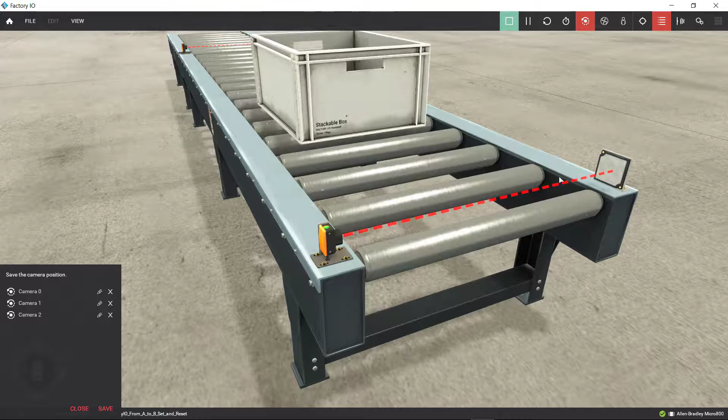Okay guys, this is another scene from Factory IO. On this one specifically, this is two conveyors. As you can see, I'm stopping on the first conveyor, then moving on to my second conveyor, and there, as soon as this sensor is made, I'll wait just a few seconds, and then the scene is automatically reset and started all over again.

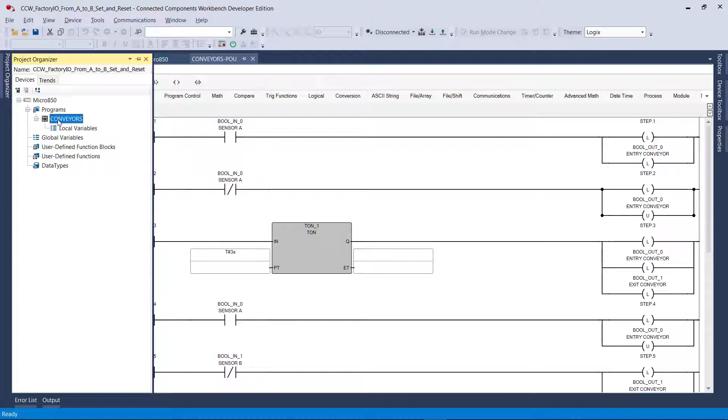Now the code, it's a little bit efficient because you turn off this conveyor if we're not using it, in order to save energy. And the whole sequence on Connected Components Workbench was completed in just one single run. So I'm going to show you the code. This is my program over here, and the variables that I created.

As you know, the variables for Factory IO all have to be global variables. So this is my global variables over here. Just the two sensors, the two conveyors, and my bits that reset my scene, and the one that tells me that it is running. Okay.

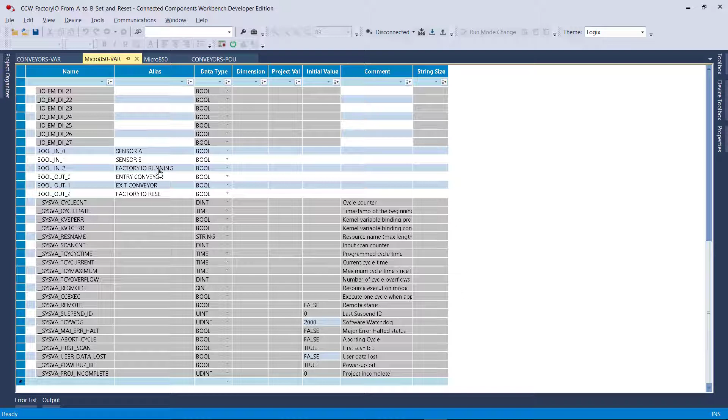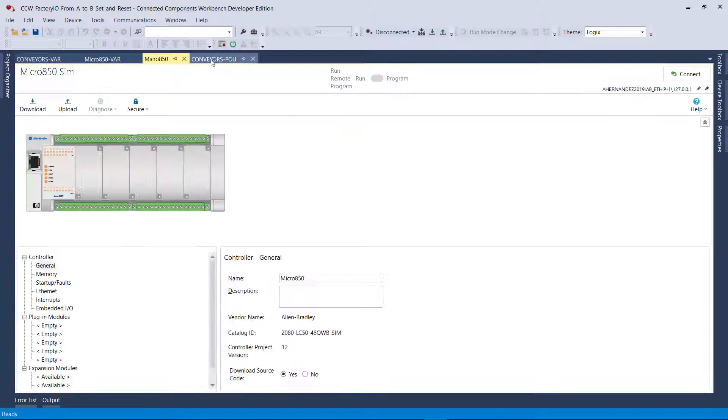So right here on my code, as you can see over here, I'm using stepping logic, like always. I created on my local variables my stepping logic right over here, a double integer, which gave me up to 32 steps. And then on my code, I got my bits that, hold on one second, let me put this on stop mode.

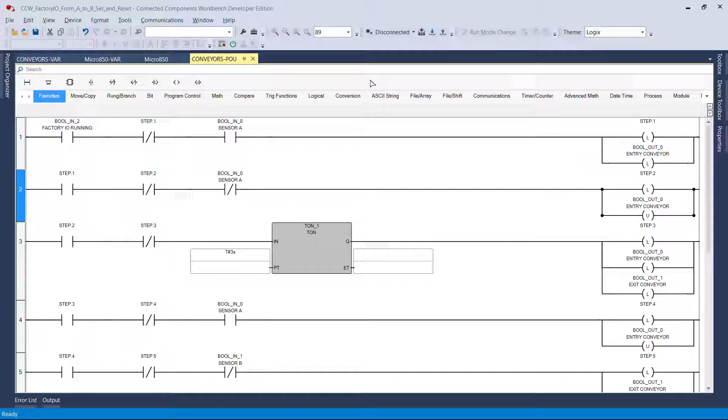See? This bit is the one telling me to go ahead and start running. If I put it on stop, it will not run, but if I go ahead and click on it, the entire sequence will start running again. So if my step one is not made, and my Boolean sensor, which is this one over here, is on, which it should be because it's normally closed, then I'm allowed to start my sequencer.

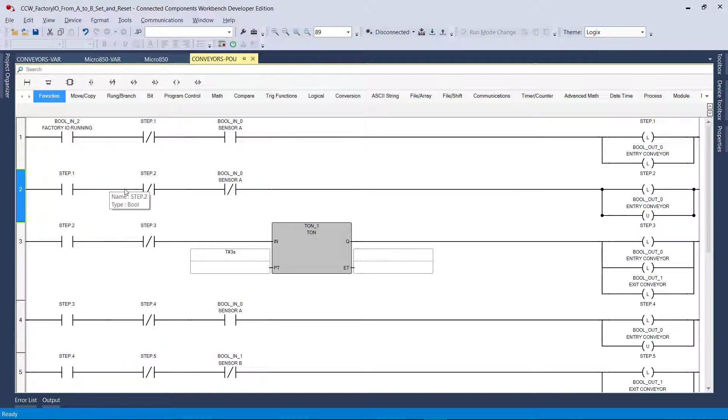So my sequencer starts with an entry, latching, and then moves on to the next one. When the load blocks this sensor, which is over here, I will stop that first conveyor. I will unlatch that bit, wait just a few seconds, and then move on to the next one and turn on the next conveyor on this rung over here.

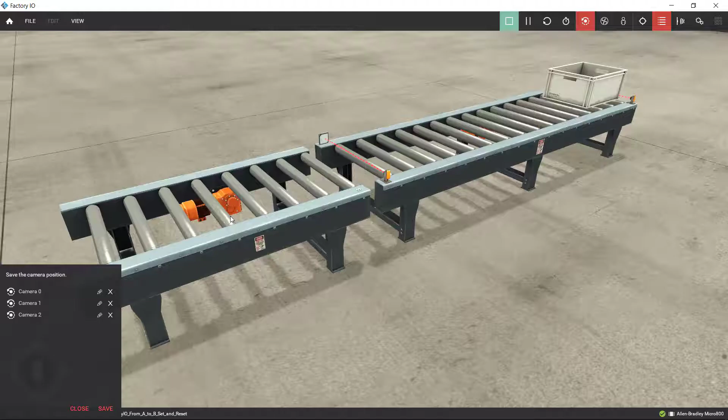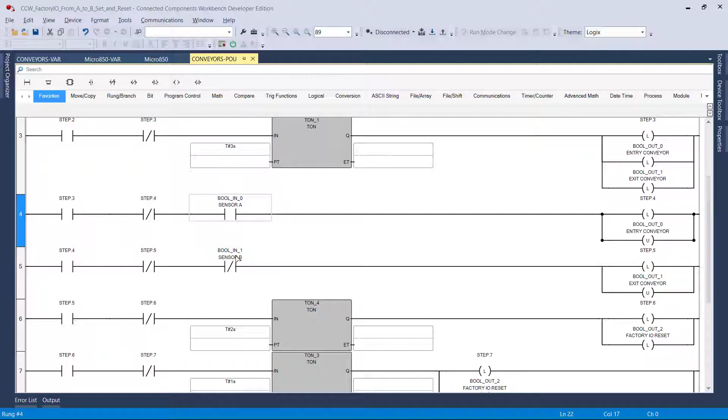Until further down the road, I can see that the sensor has been cleared, which is this behavior over here. The load is blocking, just 1 second, 2 seconds, and then boom, I wait until this over here turns off. You see that sensor over there? It turned off? Good. And then the same thing over here. This sensor detects the load, and then this rung takes over, which is step 5, and that way I can just unlatch my exit conveyor.

Then something funny happens over here that made me create an additional rung, and the problem was that if you use an OTE for resetting Factory IO, the communication lags. Hold on, let me stop this noise over here.

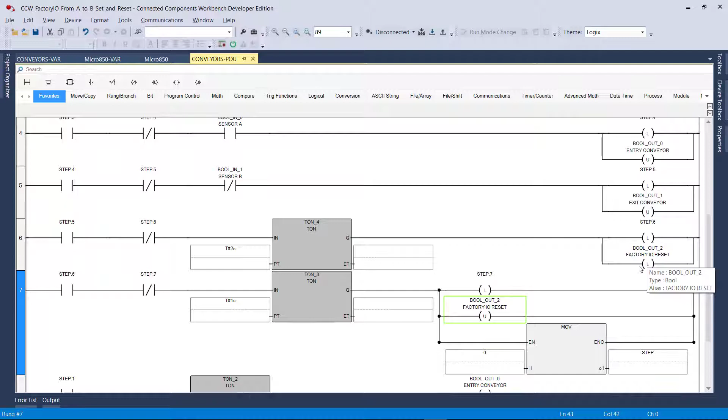I had to use a latch, then wait a second and then unlatch my Factory IO bit, because I did use an OTE over here, but the OTE was so quick that it didn't make it all the way through to Factory IO. Factory IO sometimes would see it and react and reset my scene, this is the reset button right here, but sometimes it did not. So using that OTE here doesn't make any sense.

Go ahead and use a latch. Wait 1 second over here for that latch, and then unlatch it. After that, on my next branch, boom, bingo, I will just move a 0 to my stepping logic and reset my entire program.

All right, and now below, I added this. It's just 30 seconds. What this rung does is, if I'm running my program logic, my step one has to be latched all the time while this program is running. I'm gonna go ahead and wait 30 seconds. This is just like a timeout.

If within 30 seconds I don't finish this entire logic, then I would reset absolutely everything. I will turn off both of my conveyors, and I will move a zero to my stepping logic, thus disabling this entire program. All right, let's test that. I haven't tested it. Let's see if it works.

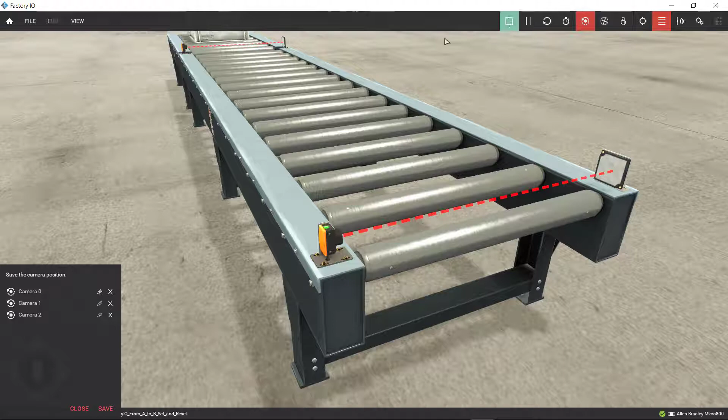I'm gonna go ahead and start the logic again, but this time I am going to create a fault on this sensor. So I'm going to go up here and dock all my tags, and on my sensor A, I'm going to create a fault, a failure, okay? So let's see what happens. See, 1, 2, 3. So the sensor is a failure. After 30 seconds, I should be timing out and everything should be reset.

Bingo. Boom. That's it. You see, everything reset again. My logic was reset and nothing is running. This is just a precaution, just like a safety. I'm using that to make sure that everything runs well. But if a sensor is not working, you don't want the sequencer to be running with a fault.

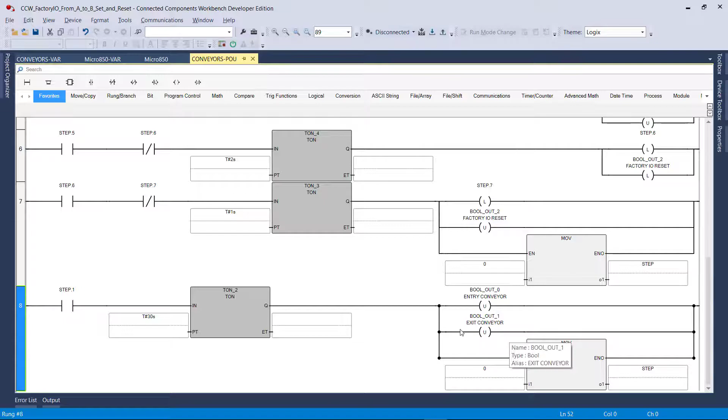So that's what this rung at the bottom of my program does. It's just a timeout bit that resets absolutely everything. And then the only way I could go back is to put it in run mode and continue. Everything will work just fine like it was before, but that's just a precaution.